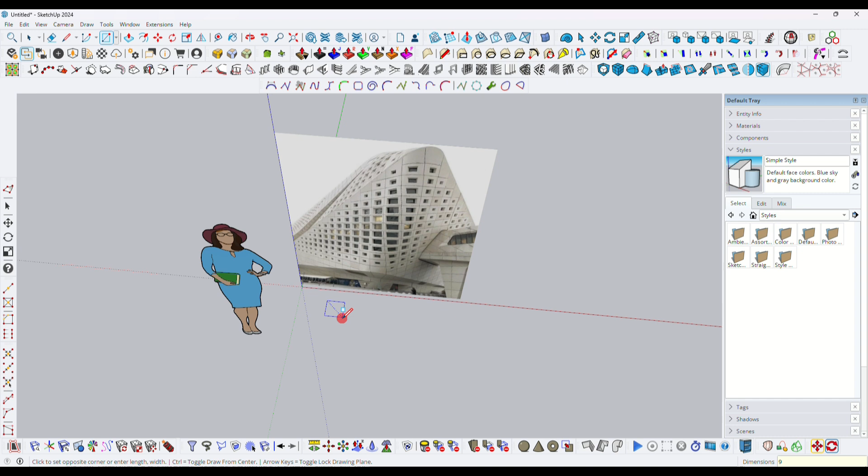So guys, first you have to draw a rectangle here. This is a 9" by 9" rectangle. Then you have to take an offset by pressing F.

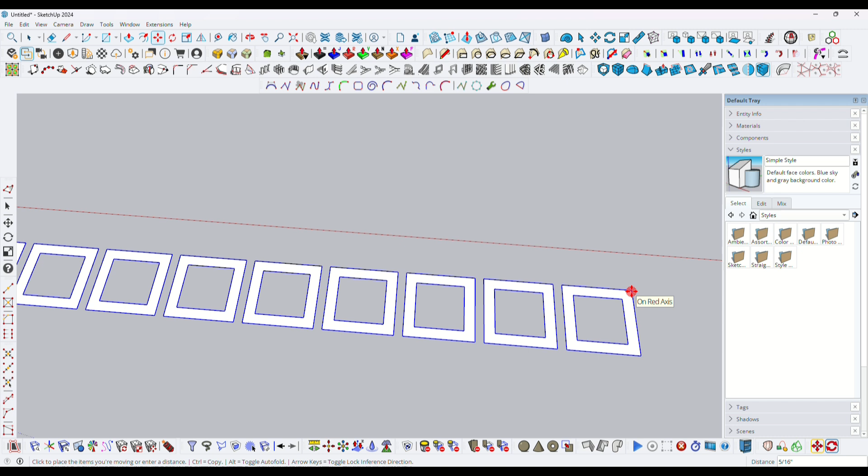Now guys, you have to make it a component. Press M and Control to copy, then type X20 for 20 copies. Do the same with all selected components in this direction, with X20 for 20 copies.

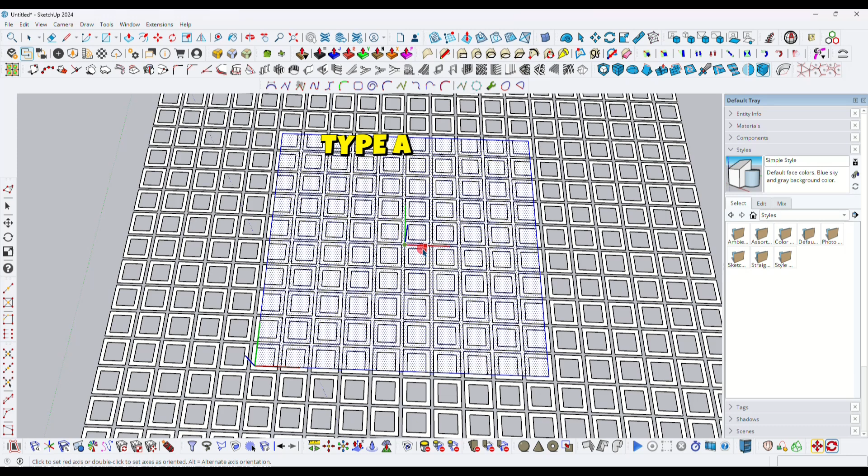Now guys, you have to draw a rectangle over here and make it a component. Click on the component option and type the capital A letter on both, and set the axis at the center.

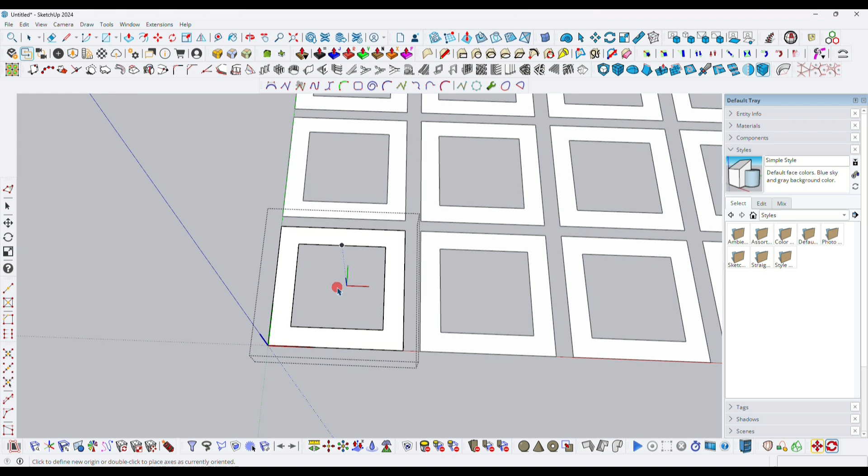Now select this rectangle and move it in an upward direction, a little bit upward. Now change the axis of this rectangle to the center. So here I am placing the axis at the center of this rectangle.

You have to press yes, and now select the entire model. Here we will use the Scale by Tools plugin and follow the same settings. Now you can see all the components are uniformly scaled from small to big, following the rectangle at the midst of this setting.

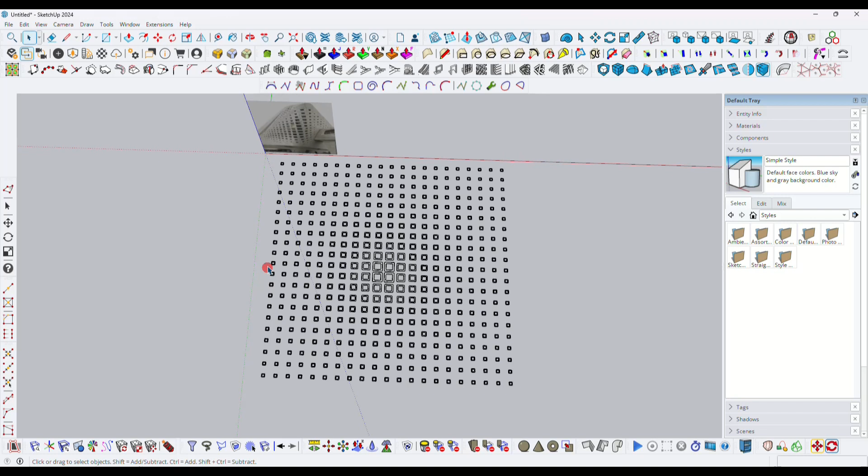So here I'm drawing a rectangle. Now select the entire rectangle and explode it. Just right click and click the explode option. Now your model is exploded and punctures are created over the surface.

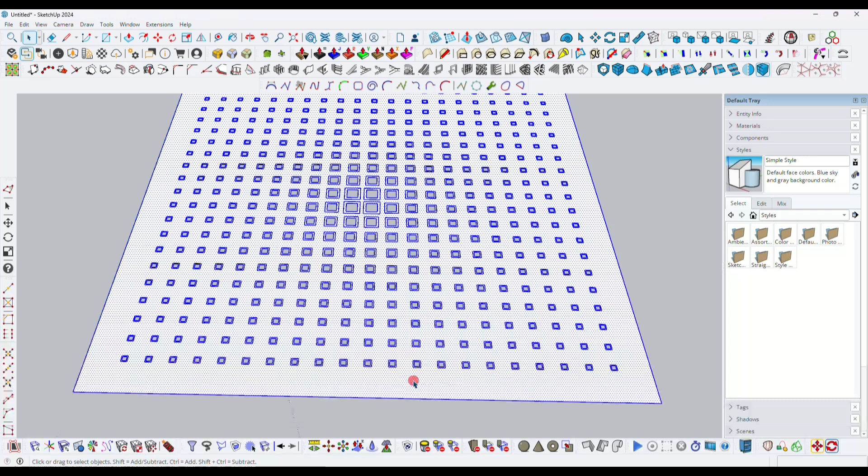Now here we will use the push pull tool to make some thickness for this model. Select the model, then click the joint push pull option. Here I am making the thickness 2 inches. Just type 2 and then enter.

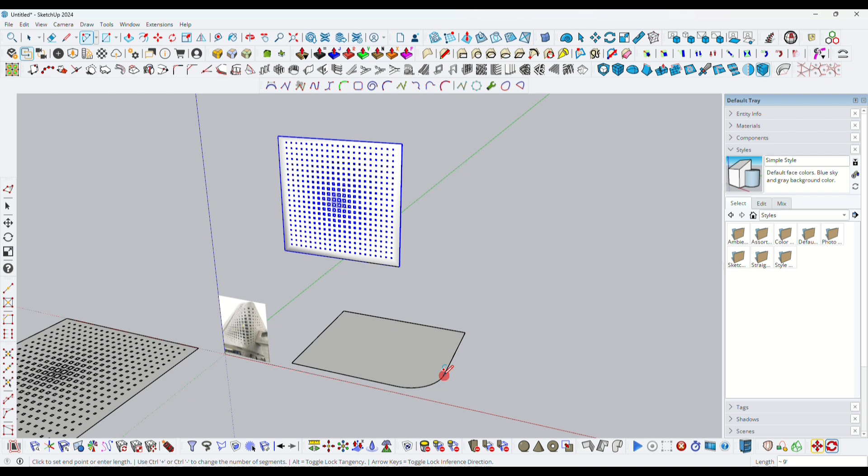Guys, now you have to rotate it just like that at an angle of 90 degrees vertical. Then draw a rectangle, and here we will use a curved line. Type A to create an arc line at this point, and draw a single line just parallel to this.

Now guys, here we will use the Shape Bender plugin. First select the model, then click a straight line, then a curved line. Now your model is bent perfectly over here.

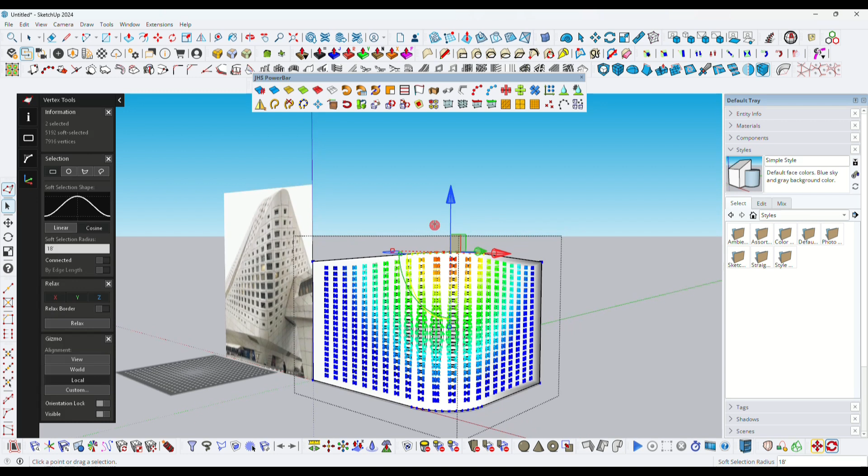Now another option is to use a vertex tool to make your model look something like in the image. Follow the same instructions. Just select one vertex and move it in an upward direction, following this string.

So this method is very easy to create such kind of building facade very easily using some paid or free plugins. JHS PowerBar plugin is free and Vertex Tool is paid. You can try this plugin on a trial basis.